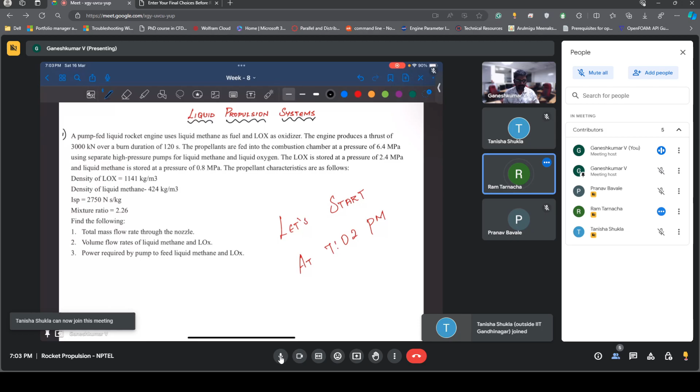Before we start, do you have any questions you wanted to ask me? Let me check my recordings. Okay, just let me check. Maybe, I may have. Could you repeat? I couldn't get it. No, I was actually going to check if I may have it. Sure, sure. No problem. So I welcome other people also here. We have Ram sir and Tanisha. Before we begin today, I was asking whether you have any questions. Would you like anything to address first?

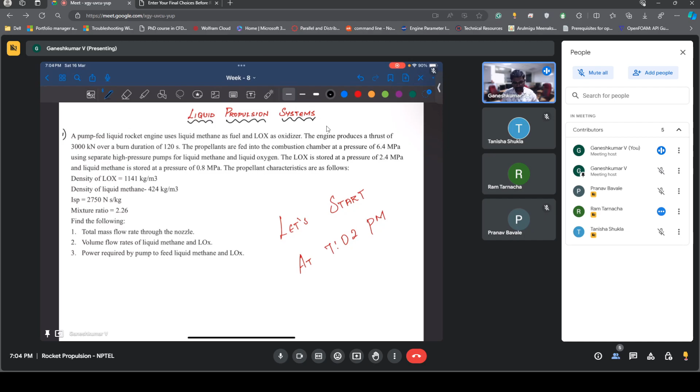All right. So if there are no questions, let's begin today's class. Ram sir, do you have any questions? No, I will ask in the end. Sure. It's related to the assignment one which has already worked. Okay, sure, sure. You can ask me at the end. Today's question is simple only. I will complete it soon.

So I have one question regarding the liquid propulsion, and also I have something interesting to show you. As I said last week, I will show you some technique which you can use to find chamber temperature, C star and ISP, instead of calculating your own by hand. That is going to be out of scope for this course, but I thought it's an essential skill if you are thinking of a career in this field. Okay, so we'll discuss more about this. Before that, we'll solve this question here.

So what we have here is 16. We have a pump fed liquid rocket engine which uses liquid methane as a fuel and liquid oxygen as an oxidizer. The engine produces thrust of 3000 kilonewton over a burn duration of 120 seconds. The propellants are fed into the combustion chamber at a pressure of 6.4 megapascal, which is the chamber pressure, using separate high pressure pumps for liquid methane and liquid oxygen.

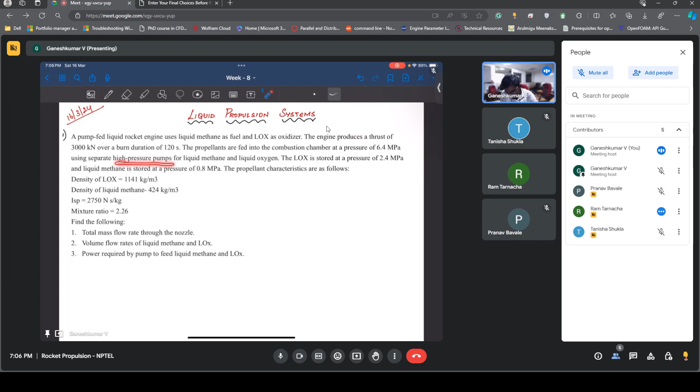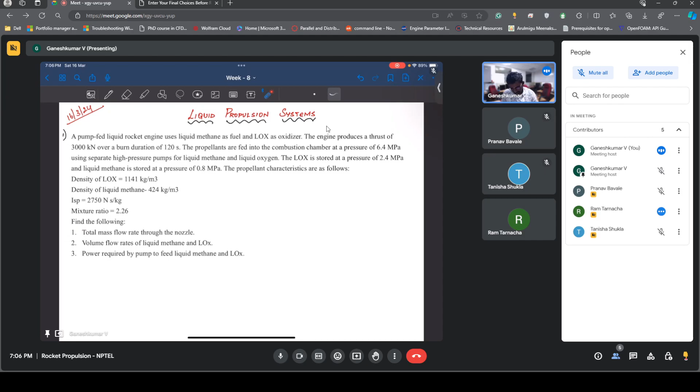There are two pumps pumping the liquid methane and liquid oxygen, and the pressure at the end of the pump is 6.4 megapascal. The liquid oxygen is stored at pressure 2.4 megapascal, and liquid methane is stored at 0.8 megapascal. They have given a few more propellant characteristics, and they are asking us to find the total mass flow rate through the nozzle, the volume flow rates for liquid methane and liquid oxygen, and the power required by the pump to feed liquid methane and liquid oxygen.

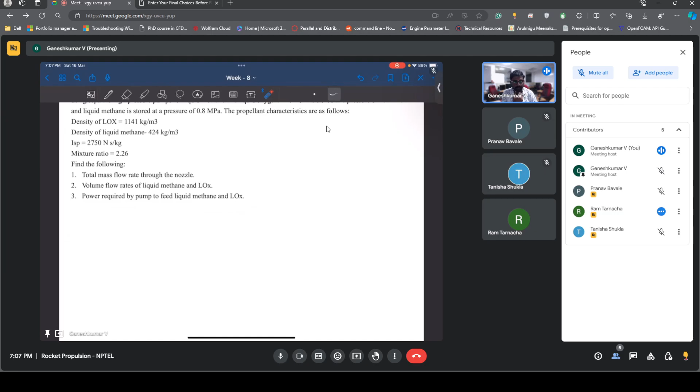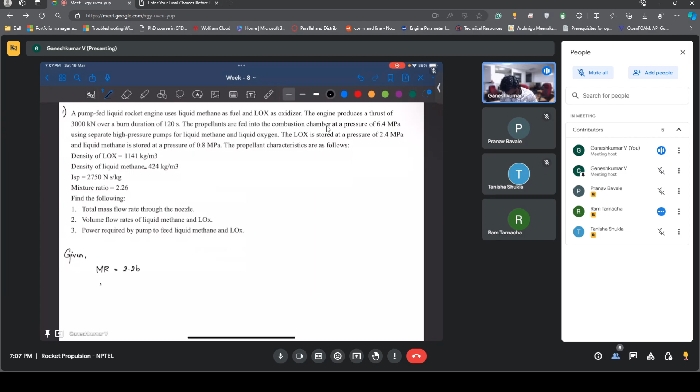So we are trying to find the volume flow rate of fuel and oxidizer, and also the pump power required. Let's first try to find the mass flow rate through the nozzle. Let me write the given. We have a mixture ratio of 2.26. ISP is given, which is 2750 Newton second per kg, or you can also write this as meters per second.

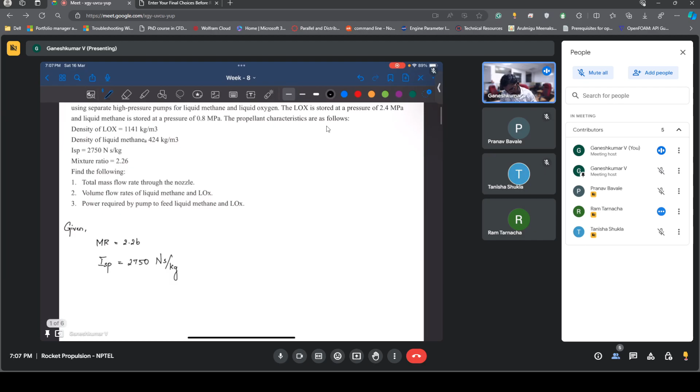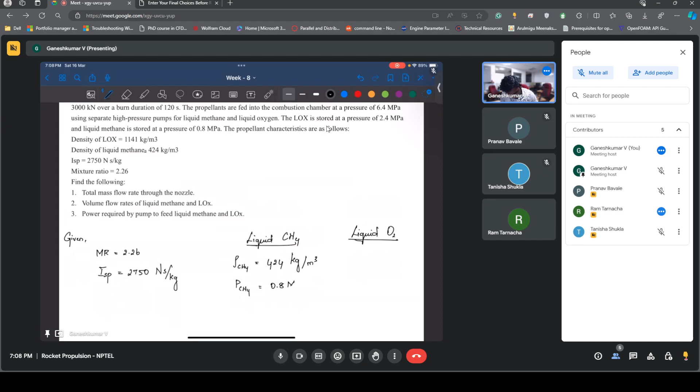Then we have a few properties of liquid methane, liquid CH4, and of liquid oxygen. Liquid methane density is 424 kg per meter cube, and the pressure at which it is stored, P CH4, is 0.8 megapascals. What else is given? The thrust of the engine, which is 3000 kilonewton, and the burn time is 120 seconds.

Density of liquid oxygen is 1141 kg per meter cube, and the pressure at which it is stored is 2.4 megapascal. I think I covered everything. Chamber pressure is given to be 6.4 megapascal. So first we need to find the mass flow rate through the nozzle. This should be straightforward for you. How do we find it? Thrust upon ISP. Wonderful.

ISP is thrust per unit mass flow rate of the propellant. The mass flow rate of the propellant is equal to the mass flow rate through the nozzle; that is mass conservation. So this is simply thrust, which I write as F, as we follow in the course, divided by ISP. So this is 3000 into 10 power 3 newtons divided by 2750. How much is the mass flow rate coming out to be? Simple calculations.

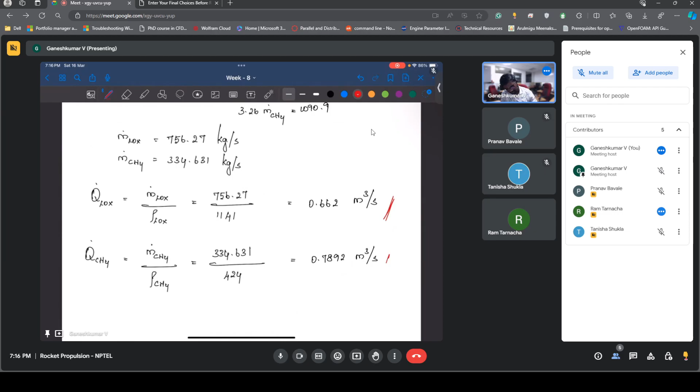For CH4, I got 0.7892 meter cube per second. Meter cube per second. Wonderful. And for LOX, 0.662. 0.662, right? Yes. Okay, thank you. So this is the volume flow rate. This is also done, straightforward. You just need to use the mixture ratio. Mixture ratio is a relative rate, so from there you can find the absolute values.

Then finally you need to find out what is the power required for the pump to feed the liquid methane and oxidizer. Why do we need a pump, and why do we need to give some power to it? Because the fuel and oxidizer need to atomize and blend in so that combustion takes place in a very efficient way. Okay, that is true, but these are separate pumps, right?

Let's say I draw this. You have a fuel tank and an oxidizer tank. This is CH4, this is LOX. Then we have a pump for CH4. Maybe I will use red color for this, something like this. You have a pump for CH4, and then you have a pump for LOX, and then this goes into the combustion chamber, and then you have the nozzle.

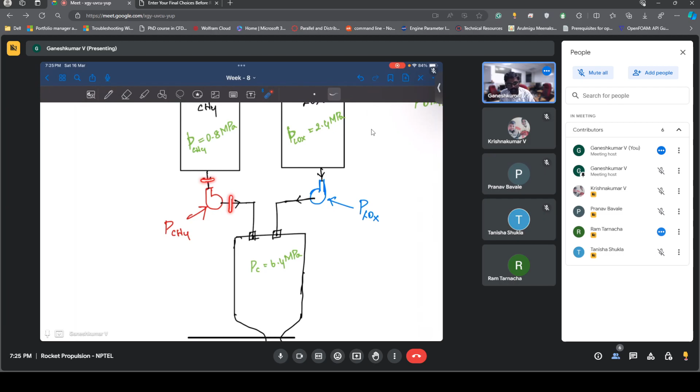Okay, so you will write the pump power of CH4 to be equal to the change in pressure. What is the delta P you are operating on? Change in pressure means, so basically from here to here, what is the pressure difference your pump is seeing? That is the delta P times the amount of volume flow rate of the fluid. Okay, so times Q dot of CH4.

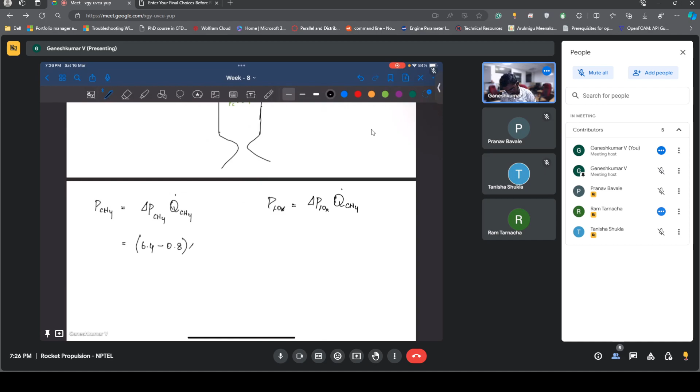Similarly, for the liquid oxygen also you can do that. So delta P of LOX and Q dot of LOX. So what is the change in pressure we are looking at for the methane? It is going to be from 0.8 to 6.4, right? So you should write this as 6.4 minus 0.8, and it is in megapascal, so please note down the units. So it should be into 10 power 6 times the volume flow rate of the methane.

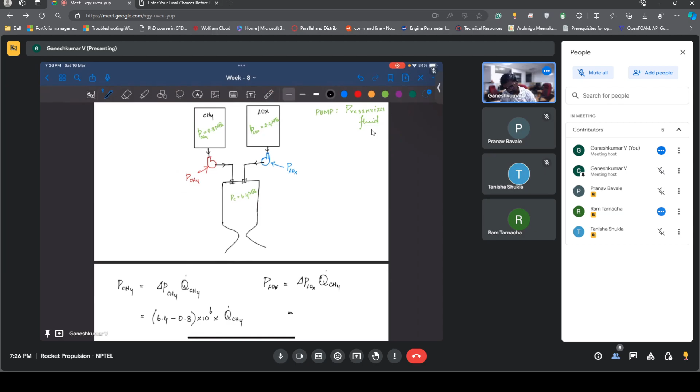And similarly for oxygen, you have to take this 6.4, the ultimate pressure, minus the 2.4, which is the pressure head you are going to give to the pump. So this is going to be 6.4 minus 2.4. Is that clear? Into Q dot of, sorry, it should be LOX. So I hope it's clear, it's straightforward.

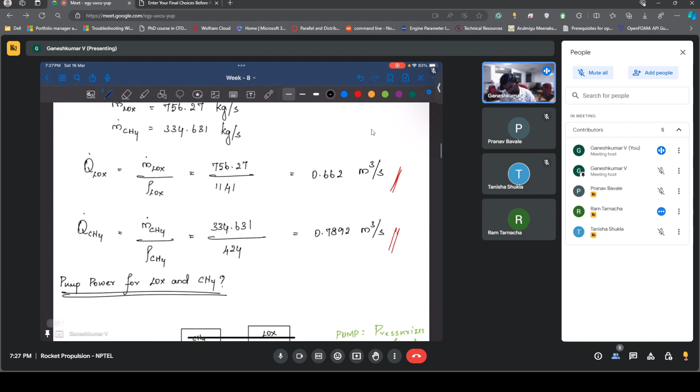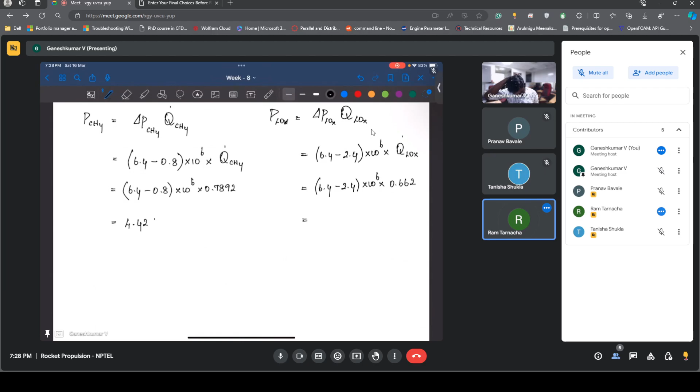So let's see, 6.4 minus 0.8 into 10 power 6 into 0.7892. This is going to be 6.4 minus 2.4 into 10 power 6 into LOX, which is 0.662. So what is the pump power we are expecting? Yeah, for fuel, 4.4186, or 4.42 megawatts. Okay. For the oxidizer, it's 2.65 megawatts.

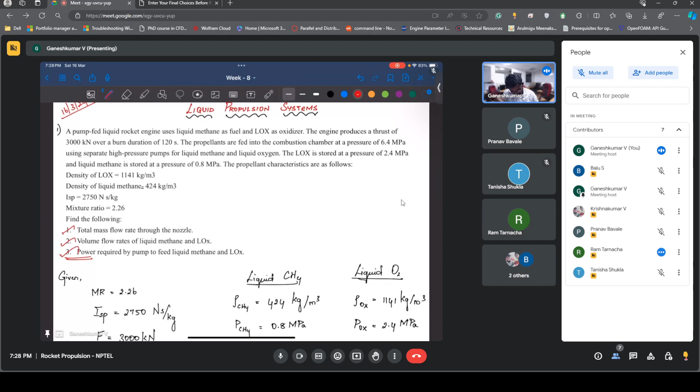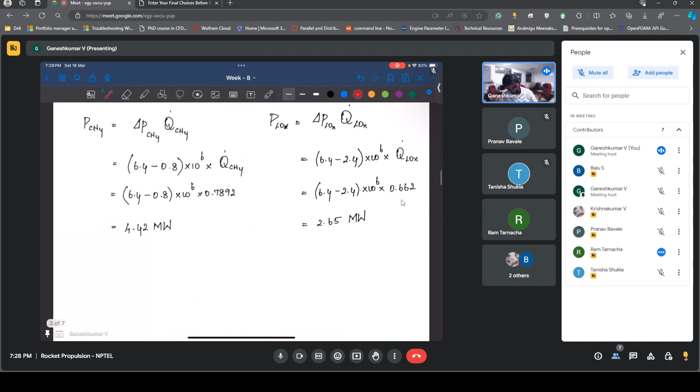All right. So this is the ideal power you will give to this pump, but all the pumps will have their own efficiencies. Here it is not given. So we found the power required to pump methane and liquid oxygen. Now, there is always an efficiency involved with these mechanical systems, right? Let's say the pump efficiency is 70 percent. So then what is the real power? Divided by 0.7. Only 70% would be used, others are lost. So if you need 4.42 megawatts, you need to give a higher power.

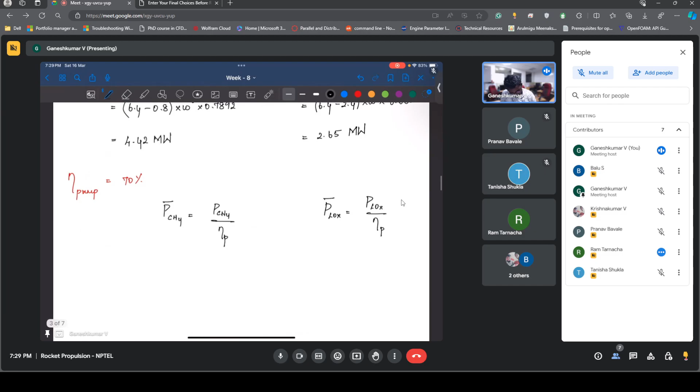So that is why you have to do, let's say this is P dash of CH4, which is going to be P of CH4 divided by efficiency of pump. So you can do this and you can find the real pump power required also. Alright. So are there any questions regarding whatever we solved now?

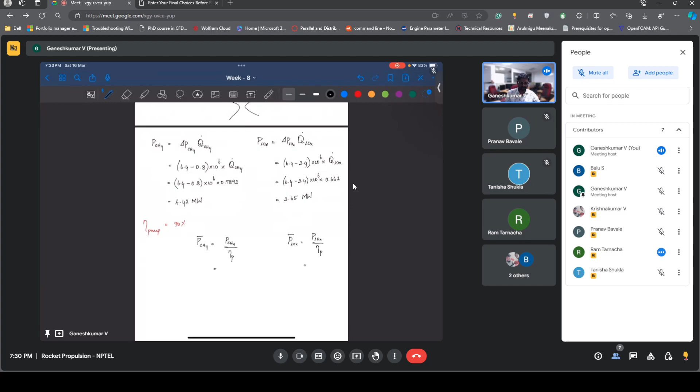So today we are very quick in solving the problems. Simple problems. Actually, I had a look at your week 9 assignments. It was simple and straightforward, so I thought, let me solve one question related to that. I think you should be able to solve your week 9 questions without any problem. Any questions you guys have? If not, we can move on to the second problem, which is interesting.

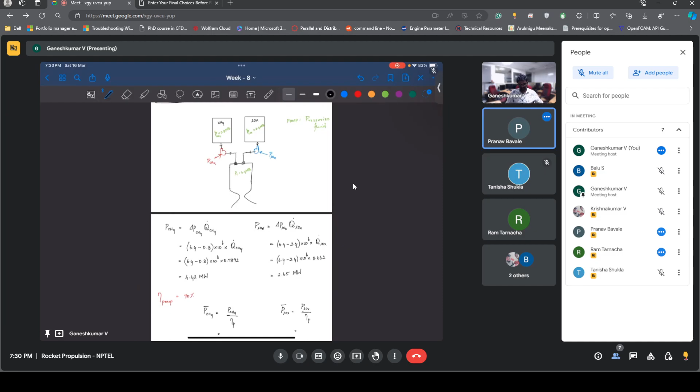Actually, it's silly, but why was the burn duration given in the question? Was there any use of that? They gave milliseconds. Right. So in this question, we never used burn duration. That is true. I think I took this question from one of the books. Maybe I omitted one of the questions where it would be useful. Yeah, in this question we are not using it. True. Okay.

Sir, are there any books you may recommend to solve similar questions like these? You can use the professor's book itself, Rocket Propulsion by K. Ramamurthi. That is what I use for this class at least. This book I have with me. Okay. There are other books also. There is one book called Rocket Propulsion by Sutton. That also you can use, but it will be a little more theoretical and explanatory. You can use it to understand a few concepts.

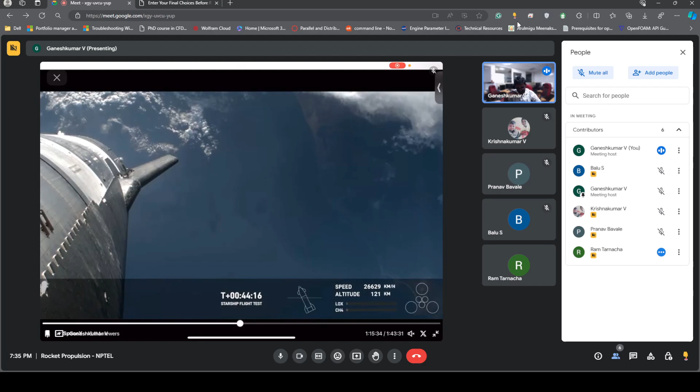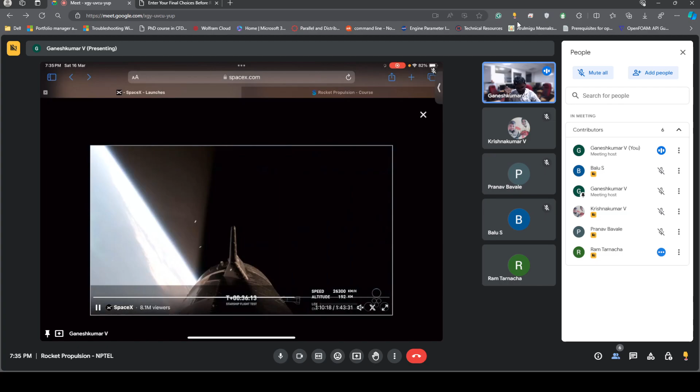But I personally like this full launch. The whole view itself is wonderful. They were able to capture it with a camera and have a live feed from there, which is also wonderful. And since you guys are doing this, I would recommend you fully watch this launch if you haven't. It would be interesting. I was showing this just a minute ago. You saw that.

So actually, you are breaking a little bit. Okay, it can be played at the end. Okay, sure. Just carry on.

Is this the end part, or is this where the rocket is functioning? Actually, the rocket is not functioning here. The rocket is re-entering the atmosphere. On the re-entry, it is entering with the tail down, so that is the frontal part. If you enter like this, you are likely to burn the tail because it is not strong enough to withstand the temperature.

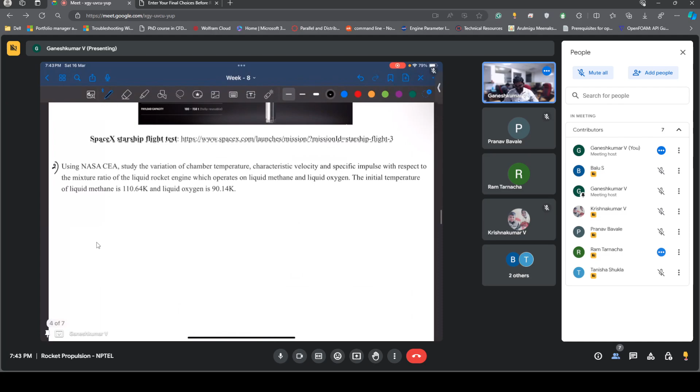One thing, unfortunately, they couldn't recover it. It's actually fully reusable, they have written it. So once it becomes an operational flight, it will become a fully reusable flight actually. Makes sense. So I think you guys can have a look if some of you haven't watched this launch. It's an interesting thing to watch.

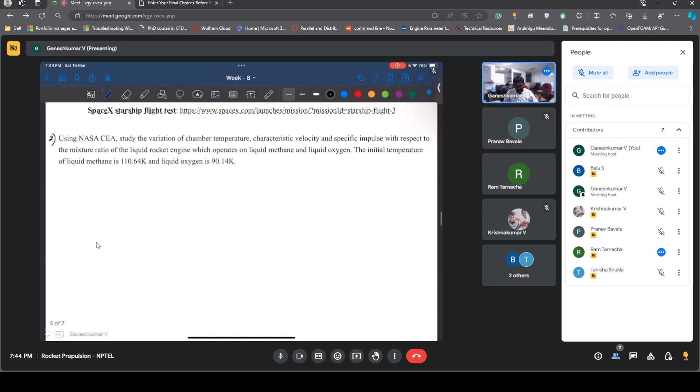So going forward, I have this one question. Before that, does anyone have any questions you wanted to ask? So, I hope there are no questions.

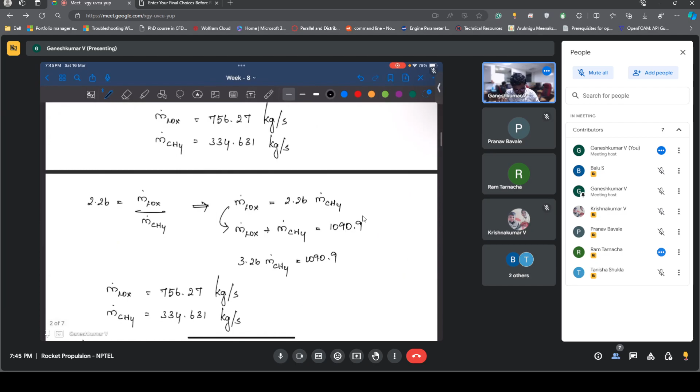So if there are no questions, what we will do is we will try to use some software, or you can say a tool. Basically it's a tool to find the chamber temperature, which is an essential quantity, and also characteristic velocity and specific impulse for any propellant you select. For example, this time I selected liquid methane and liquid oxygen. This is what they use in the Starship also. This is the same propellant we used in the previous question also.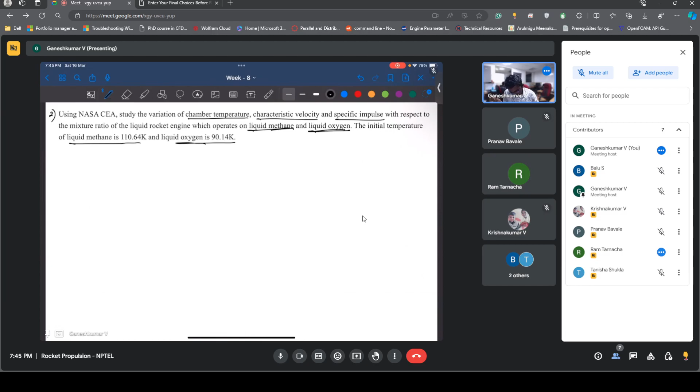So for a given propellant, liquid methane and oxygen, let's try to find out the chamber pressure, chamber temperature, characteristic velocity and specific impulse. What we are going to use is something called NASA CEA. It's a freely available tool which I will demonstrate now to you. So here CEA is nothing but, I think, chemical equilibrium analysis.

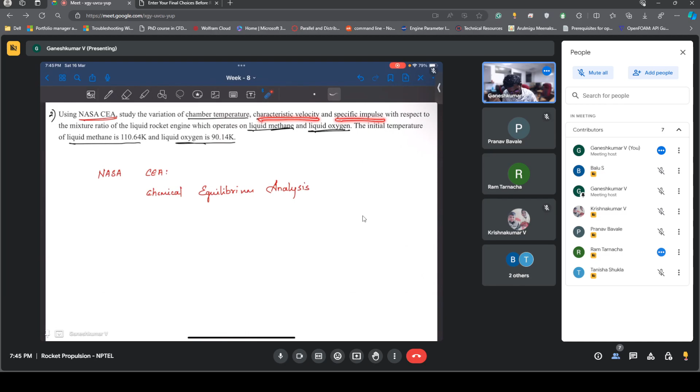Okay, so what we will do is we will use this tool. And for different mixture ratios, for example, maybe I will read this: study the variation of chamber temperature, characteristic velocity and specific impulse with respect to the mixture ratio for the liquid rocket engine which operates on liquid methane and liquid oxygen.

So for a set of mixture ratios, you try to find out which mixture ratio works better. That is what we are going to find out. And the initial temperature is the temperature at which you are storing your liquid methane and oxygen in the tank.

So if we are not using any tools, if you want to solve it by yourself, how do we do it? We will select a mixture ratio, right? Let's say from the previous question, if I select it to be 2.26, how will I find the chamber temperature? We already did this two weeks back.

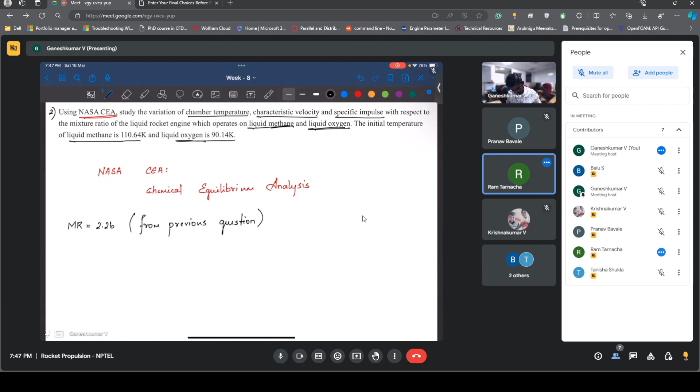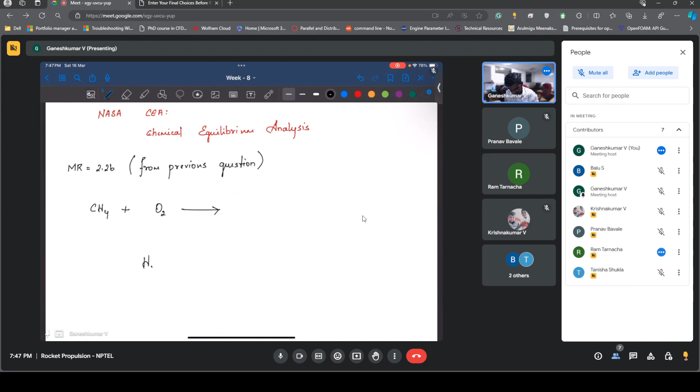So we have methane and we have oxygen, which gives us something, right? And then what do we do? We will say H of reactants equal to H of products, and then from here we will find T adiabatic. Basically we are trying to find out the adiabatic flame temperature, that is the chamber temperature. So this is how we do it. Is it clear, or am I missing something?

Okay. But the question I'm going to ask is, what are the products you will consider? Sir, H2O and CO2. If the mixture ratio is stoichiometric, then you will get CO2 and H2O. But in a real situation, you will not expect it to be just CO2 and H2O, right?

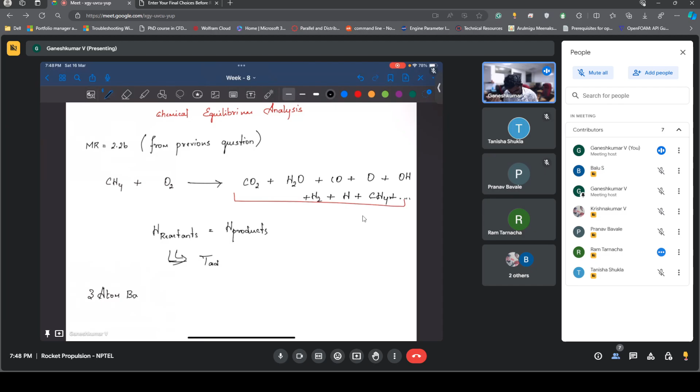In fact, you will have CO, O, even an O atom, OH, H2, H, and a lot of other things like this. You can even have methane in it. But the problem is you do not have enough equations to solve. You have only 3 atom balances, and you have a lot of products. So just by atom balance you won't be able to solve it, right?

Is it clear? We addressed the same question earlier; I'm just trying to remind you. So from the mixture ratio, find out how many moles of O2 are participating in the combustion process, which I calculate comes out to be 1.13 moles of oxygen. From there, if I try to balance the equation, it's up to me what I'm going to consider in the products. But nature doesn't know.

So what I'm calculating, considering my idea of the products being formed, the adiabatic flame temperature may not be the correct flame temperature. Exactly. So going by this, all of the previous questions in the assignment are just an approximate guess. True. That is the main reason we do not really rely on this. It is to give you an idea of what really happens.

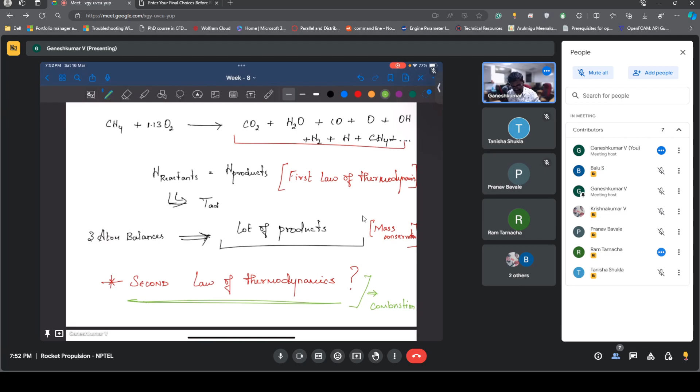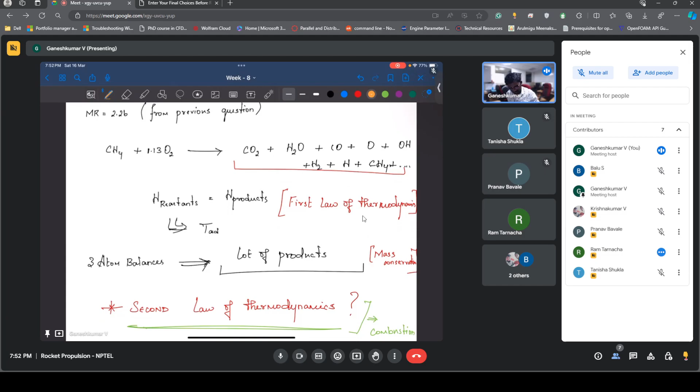That's why you might have been given a little bit of idea about equilibrium analysis in the lectures, but people don't go in depth, because it actually falls in the realm of combustion. If you take a combustion course, you will know better about this. Also, hand calculating is not very easy, because you select some variables and hand calculate, but that temperature is not true. And the other problem is the temperatures you are dealing with are around 2000 to 3000 kelvins.

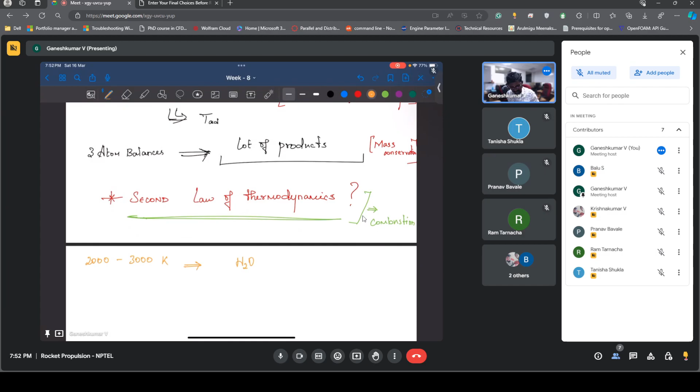In 2000 to 3000 kelvins, you will calculate that this much amount of moles of H2O is present. You might calculate it, but 2000 and 3000 kelvins are high temperatures. This can undergo dissociation and it can form OH and H, or it can also form H2 only. So all these dissociation reactions can happen.

So ideally you will never have H2O, or you will have less amount of H2O than you calculate in the real systems. So you will not be able to accurately predict the temperature. Okay, and that's why people use these highly sophisticated tools in order to find it. Let's see how we can solve it. So are there any questions till now? Okay, so if there are no questions, I hope you guys understood the motivation to use any tool.

These softwares, CEA of NASA, does it cover the aspects of statistical thermodynamics, entropy maximization or something? Right, so either you can say entropy of universe maximization, or you can say Gibbs free energy minimization. Yes. So they use minimization of Gibbs free energy actually. So let me also show that to you.

So basically instead of this second law of thermodynamics, they say it's called minimization of Gibbs free energy. So I would recommend you to read about this. How does the second law of thermodynamics, which is delta S universe should always be greater than 0, actually give us delta G to be less than 0? Okay, minimization of Gibbs free energy. So this is how this NASA CEA tool is going to work.

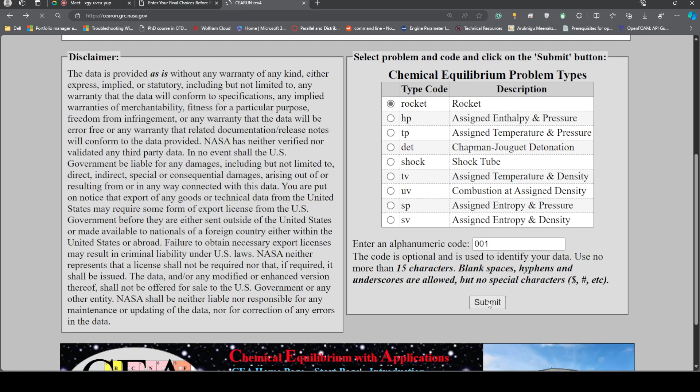So if you start this, one second, sorry, rocket. Okay, you select this, and then it will ask you for some pressure. Let's say for example we have 6.4 megapascals, which is like 64 bar. And then if you go forward, it will ask you to select a fuel. In the fuel you have a lot of fuels here. Let's select methane, there are methane, liquid methane, hydrogen. RP1 is rocket propellant 1.

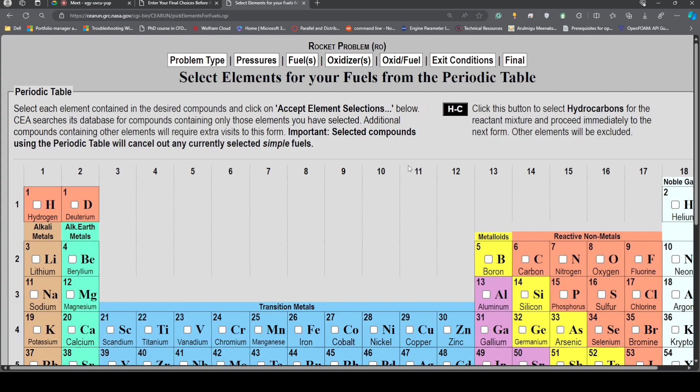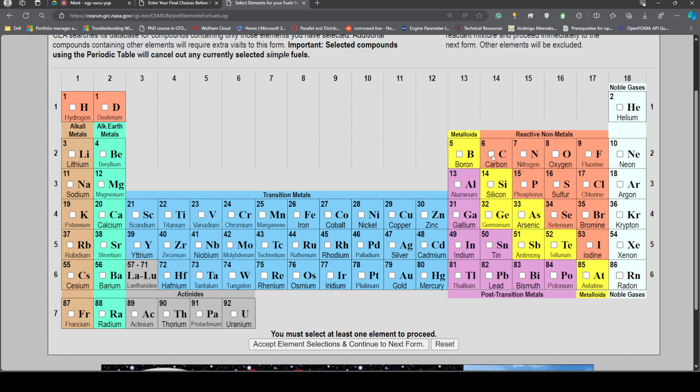And there is something called use periodic table also. So you can select periodic table if you want something else. For us it's just liquid methane, so I could have selected there, or you can select here also. Carbon and hydrogen would be the methane, and accept elements and selection. So you will have these many fuels available. In that we are interested in just methane. Where is methane? CH4 liquid, this one.

And it should be liquid, so that is why we have a parenthesis liquid. Let's say we go forward. You can add a few more fuels also, but I have only one fuel, liquid, so the proportion is 100%. Here they will ask for temperature, so the temperature we are going to give is 114, I guess. So the initial temperature is 111.64 is the temperature I am giving.

And then you should select now the oxidizer. The oxidizer here is going to be simply liquid oxygen, so we'll select that, and liquid oxygen's temperature is also given, 90.14. And then if you accept and select, then you will have mixture proportions. So for the previous problem we did a mixture ratio of 2.26, right?

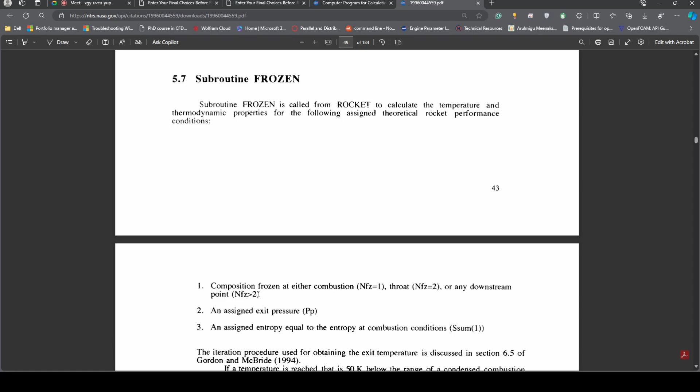So subroutine frozen. Here you can see the composition is frozen at either combustion, which is option 1, at throat, which is option 2, or any downstream point that you want to specify, which will be more than 2. So if you select frozen and select 2, you are freezing your mixture composition at 2, and after that you are not allowing it to vary, and then we find the performance. It's the same thing the professor says. For now we will do the shifting equilibrium calculation itself.

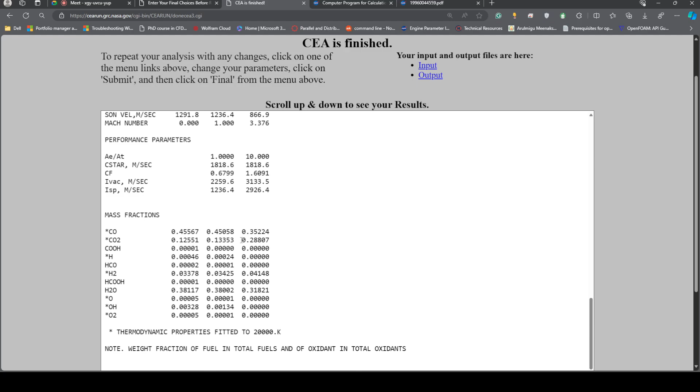And similarly at the exit you can see the temperature is 1270 Kelvin, and at this point you can see a little more CO2. Which means the lower the temperature, the more easily the recombinations can happen. But if it is a higher temperature, all this CO2 will not remain as CO2, it will remain as CO and O. Or H2O will not remain as H2O, it will remain as H and OH. So this is with respect to temperature.

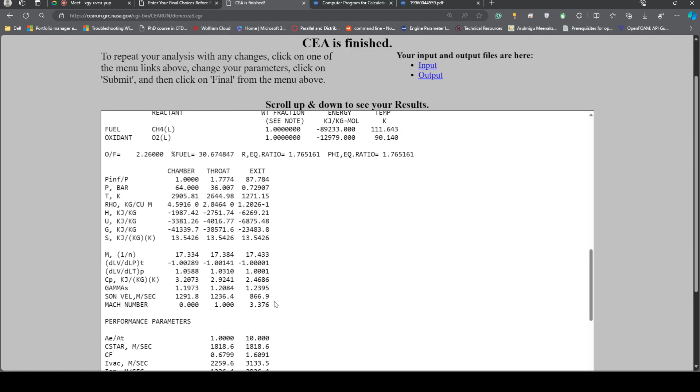Now addressing your question, what we will do is go back, and for a different mixture ratio, let's see which mixture ratio works better. We are interested in increasing this temperature, right? This temperature increase will lead to a higher performance. In fact, you can see the performance parameters. This is Ae by A star. You can see at the exit we gave it 10 as an input.

So you get a C star value of 1800 meters per second, and Isp is around 2926 meters per second, which is something like 300 seconds. Now our interest is to have a higher Isp and higher C star, and the consequence is you will end up having a higher temperature in the chamber. So we will try to modify the mixture ratio and see what happens. Is everyone clear on what we are doing? Oh, yes. Okay, interesting.

So let's go back. There is this oxidizer-to-fuel ratio which we want to change. You can give 30 values here, or you can give an interval, from a low value to a high value. We started with 2.26. Let's say we'll start with 1.5 to 2.5, or we can go to 3 also. And the interval, let's say we'll put 0.1. So you will have 15 data points. Now we will accept and continue to the next form.

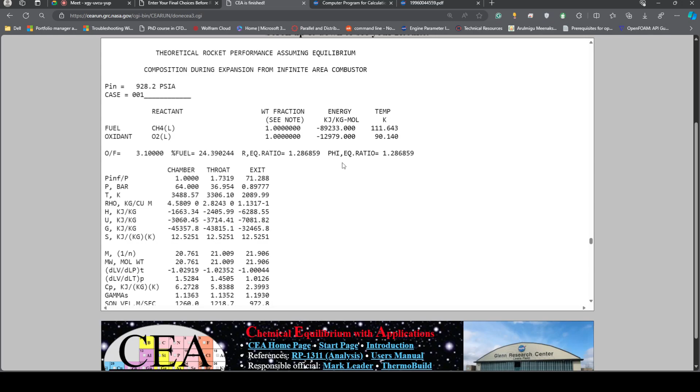So 3 is 3043, and 3.1 is 3041. See, so this is the highest. 3043.8 is the highest, which is at 3. So somewhere between 3 to 3.1, you will have about 3000 meters per second as your ISP. So this is the highest ISP.

So now you check the temperature of this. It's 3458, a very high temperature, right? And you check the mass fractions here, and you will see the mass fraction of CO is higher than CO2. But somehow H2O remained as H2O. This is in terms of mass fraction, so it might be misleading. Maybe if you change it to mole fraction, you will know better. So anyway, we have the highest ISP here, 3043, for which the temperature is 3458 Kelvin.

Now if I go a little less, 3042, you have temperature decreasing, which means higher temperature is coinciding with higher ISP. Now look at this. We have oxidizer fuel ratio of 3, temperature 3458 and the higher ISP 3043. Now let's go to 3.1. 3.1 has lesser ISP, 3041, not much less, 2 meters per second less. But you see temperature is higher, 3488. Previously it was 3458.

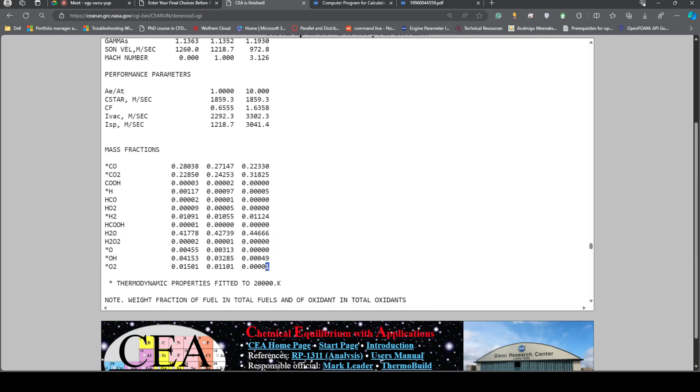So the peak in temperature with respect to mixture ratio and the peak in ISP with respect to mixture ratio are not the same, which means the ISP is actually affected by these dissociations happening in the mixture composition. These are a few things you can observe from this kind of analysis. In fact, if you go to 3.2, the equivalence ratio is 1.24, which means it's becoming fuel lean, a lot of oxidizer is present.

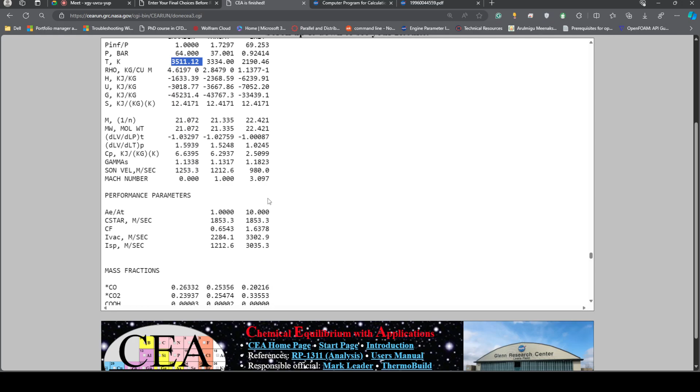At 3.4 you have 3500 Kelvin, which is greater than previous temperatures, but ISP is less. So higher temperatures will not directly correlate to the highest performance because of this dissociation. That is what I wanted to specify here; you can see a lot of dissociations happen. If you go a little further, again 3500, you will see very poor performance even at higher temperature. So higher temperature is not ideally higher performance; we can correlate them, but the peaks are different. That is what actually happens, which I wanted to show. Any doubts at this point?

Okay, we have a question. Why is ISP in units of meters per second? It should be Newton second per kg. Actually, both are the same. If you look at Newton second per kg and expand Newton, it will give you meters per second at the end of the day. So you can either use meters per second or Newton second per kg. I hope that clears your doubt.

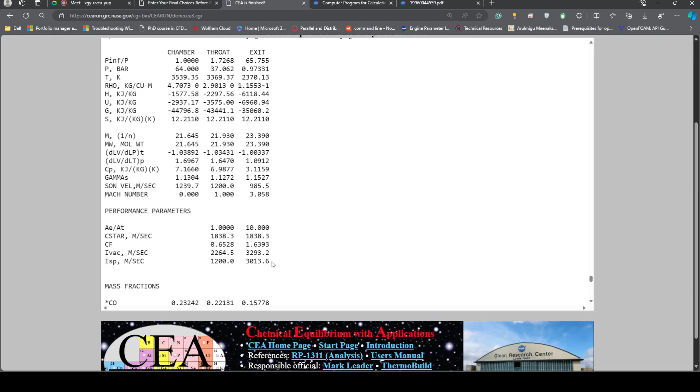So what else you can do is, I will show you other things also. We changed the mixture ratio here. What we can also do is change the pressure. We did it only for 64 bar. You can change the pressure and see its effects, and in that way you can modify it. You can run your rocket at a constant pressure of whichever gives you the highest ISP. So this is how you select the parameter of chamber pressure.

And if you select that chamber pressure, similarly you need to select the pumps. The pumps are going to pump the liquid methane and the liquid oxygen into your system. The power to the pump will also increase when you increase the pressure. So you see a lot of variables come together, and you have to be very careful, because you cannot give infinite power to the pump. So it's actually a sweet spot between pump power and rocket performance.

Okay, so you can change this pressure. Sir, I don't understand the difference between shifting equilibrium and frozen. Okay, I will tell you.

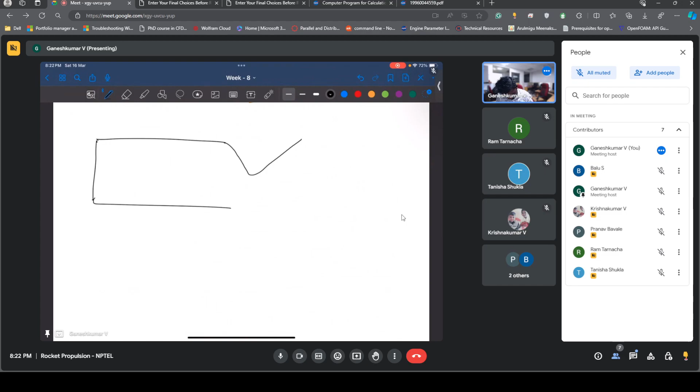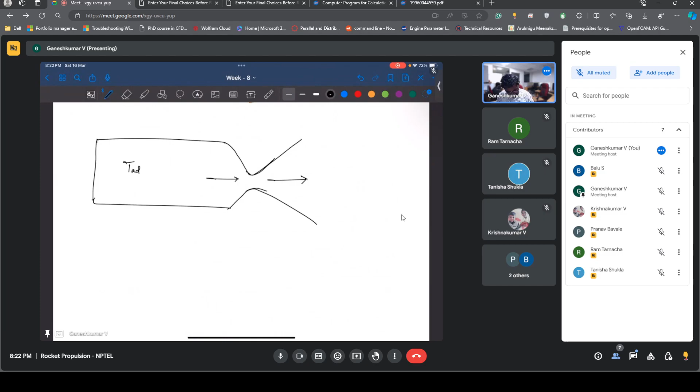What we have here is this rocket, and then you have the nozzle. The temperature here is going to be the adiabatic flame temperature, and as the flow goes, the temperature will keep on getting reduced. So it will be something like this. Now the gases present here, let's say O2, H2, OH, CO, CO2, and a lot of things, will be based on that adiabatic flame temperature. Now if this reduces, your equilibrium also shifts.

As temperature decreases, the CO and O coming here can actually meet and become CO2, but only if it reaches equilibrium. Whether it will reach equilibrium or not, we don't know. Either it can reach equilibrium or it can just stay as CO and O. If it just stays as CO and O, then it's frozen. So either it will be in equilibrium or it will be frozen.

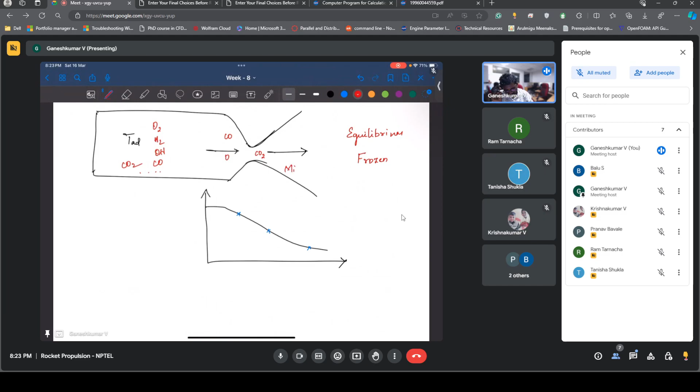These are the two extremes, and you can be anywhere in between. That's why we have two options: equilibrium and frozen. You do your analysis for equilibrium and get your performance, you do your analysis for frozen and get your performance, and your real rocket's performance is going to lie between these two. The mixture composition and the temperature are what affect the performance, ISP and C star.

So either you do equilibrium analysis, saying it can attain equilibrium everywhere in the nozzle, or you say it will not attain equilibrium, and whatever comes here stays as it is as it goes through the nozzle. Basically there won't be any recombination reactions happening. If you say that, it's frozen. If you allow it to equilibrate, then it's an equilibrium analysis. Is that clear? Did I address your question?

Yes, sir. Okay. So what I was also telling is, let's say you have a plot of mixture ratio with respect to adiabatic flame temperature, or let's say ISP. Now if you do an equilibrium analysis, you might have something like this. This, let's say, is the equilibrium analysis.

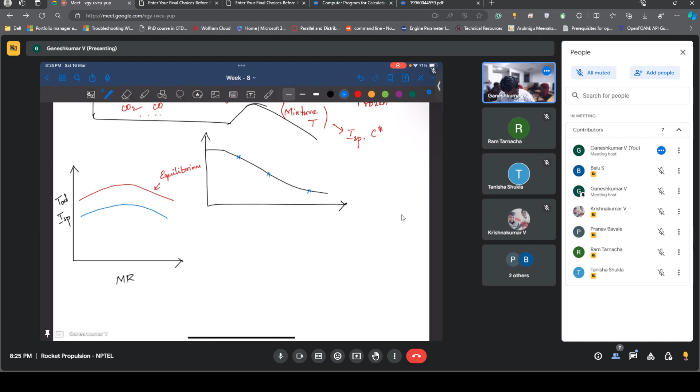And let's say if you do a frozen analysis, your performance would be slightly lesser. This might be your frozen. Okay, and your real rocket performance will lie somewhere in between. Okay, that's why they have two options, so that you will understand what is the range in which my real rocket is going to operate.

This range can be very low, so if you are talking in ISP, let's say it can be in the range of 10 meters per second, or 20 meters per second. But that is better than what we do doing hand calculation. We might be off by hundreds, even 50 meters per second in terms of ISP, and in terms of temperature we might be off by like 500 or 1000 kelvins.

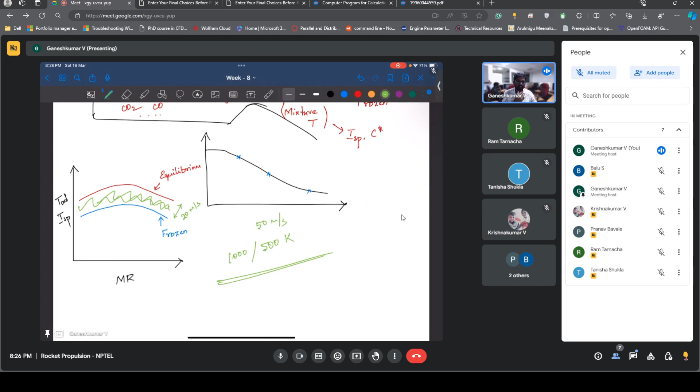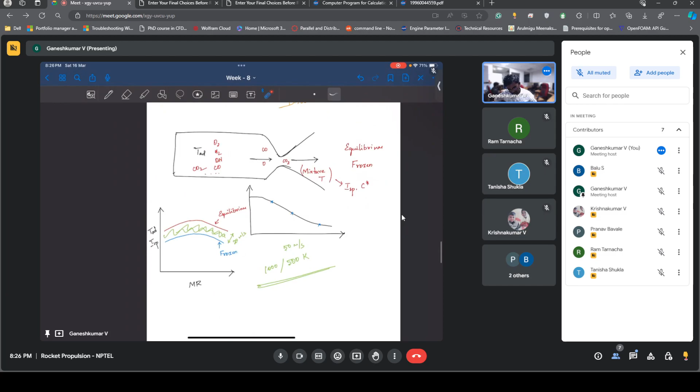Okay, because we simply don't consider that recombination reactions happen, dissociation reactions happen, and also we do not consider all these species in our mixture. We consider only, we are good with only CO2 and H2O. Okay, any other questions?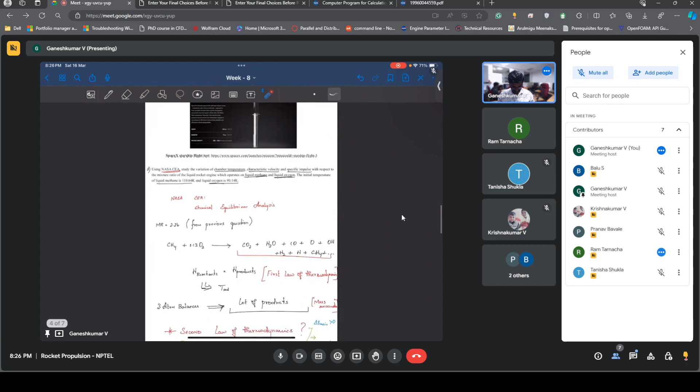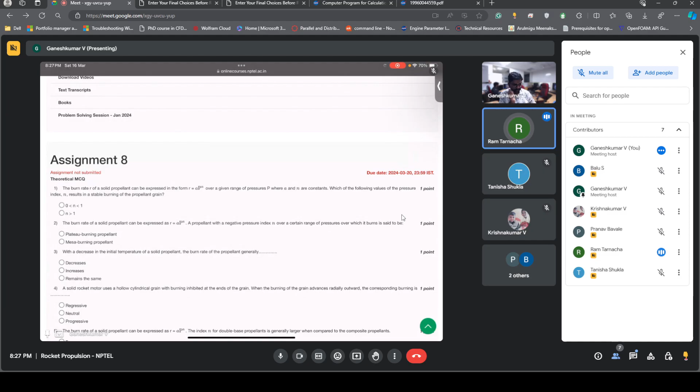I had a question which I said I'll ask in the end. Yeah, please. Assignment. Yeah. Can you open the assignment 8? Week 8. I've written this assignment. If you look at question 11, there is the data given there. This one? I have also opened this. Yeah, this data.

If we read it, it says radially outward and inward burning solid composite propellant grain is designed as shown below. Mm-hmm. And the grain is shown there. Correct. Normally, what we are discussing in the class and as a convention, we will consider that the outer grain is burning radially outwards, and the inner grain is burning radially inward. Correct. Right. That is the convention.

From the statements that is written there, one could also consider that the outer grain is not case bonded to the combustion chamber, and it could also burn radially inward. That is one of the possibilities which is not clarified in the statement. So, radially burning solid composite propellant grain is designed as shown below. If it was said that the case bonded grain, then the situation would have been clear.

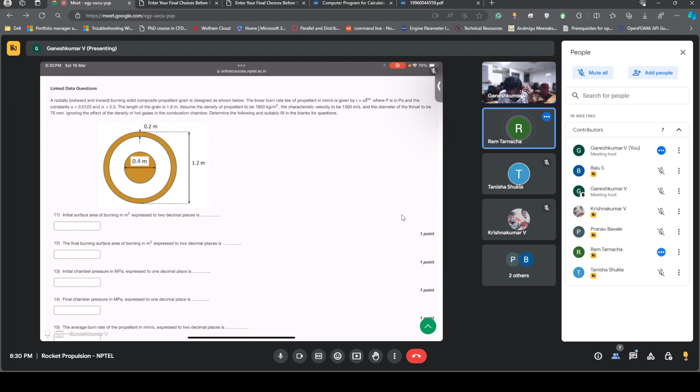Another question is, when I do this question 13 and use that formula, the combustion pressure, that is equilibrium pressure, is equal to rho P into SB into A into C star divided by A T, to the power 1 over 1 minus N. When I do the calculations, I find the pressure is coming to be exorbitantly high. It is 1 lakh megapascals.

Yes, sir. I see. She's also feeling the same way. Maybe the units of A, we would like to know. Okay. I'm not getting the right thing here. Okay. It so probably happens. Can we quickly do the calculations? It's a simple calculation. Right. Rho P is 1850. What is the burning time you are getting?

Let's say 1 lakh. No, time is important, not pressure, right? What is 1 lakh megapascal? Oh, burning time is a fraction of a second. It's like explosion. I see. So may I know the pressure you got? Initial pressure? Or sir, either white portion is a grain.

White portion. No, see, can't the white be grain? If the white portion is a grain, it means then here they cannot shift the convention, right? In the second question, what was shown is an initial port volume which has a square cross section. So it's a port volume with a square cross section. That white is actually empty. The port is square in cross section, which means it's empty. That's not the grain.

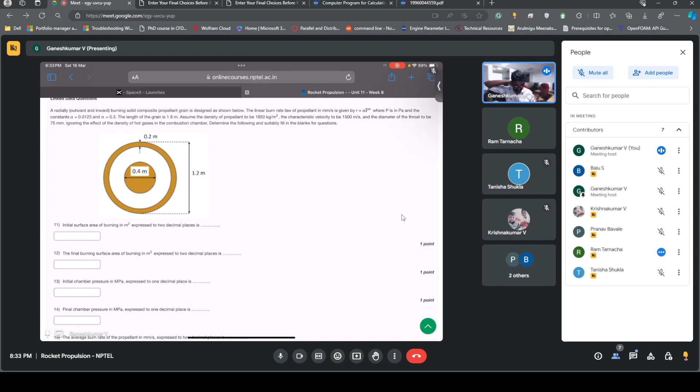I see. So it looks like burning rate is 24.54 mm per second. So burning rate is in mm per second. Have you taken that into account? Where is the burning rate? Is it given here? Linear burn rate law of propellant is mm per second. Value of A is given, value of N is given. But burning rate is in mm per second, right? Correct, that is not given.

So I think I understood where the problem is. Okay, I got it. You do the math properly. Understood. I think Tanisha, you also should do the math properly. So see what are the units of burning rate. It's not in meters per second. You should know whether the formula you solved took R to be in meters per second or millimeters. You should know the units of A and units of N. N will not have a unit, but you should know the units of A.

No, this point was discussed in the class also. A is a constant, unless we consider this as a reference burning rate. Actually, A does have a unit. A cannot be unitless. If A is unitless, then you will never match R = A P^N. R is in meters per second, P is in pressure. There is no way we will be able to match the dimensions on both sides. So A does have a unit. Correct, A becomes meters per second divided by pascals to the power N.

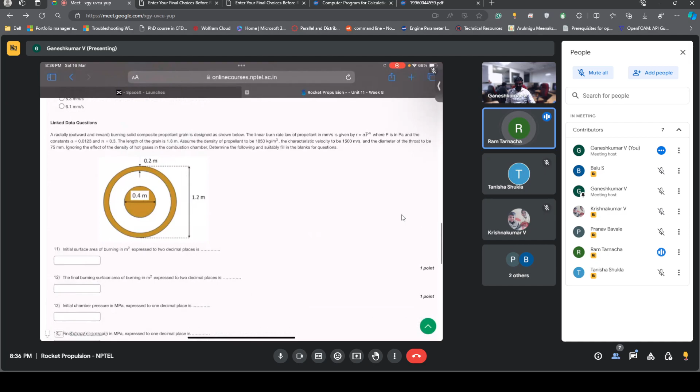There are plenty of questions where the PC has to be found out. There are other questions also, and everywhere I was getting exorbitantly high chamber pressure. It was there in my mind that I should use the value of A properly. True. I am not using the value of A properly, so I will have to have some factor multiplying with that, converting this to proper units. Okay.